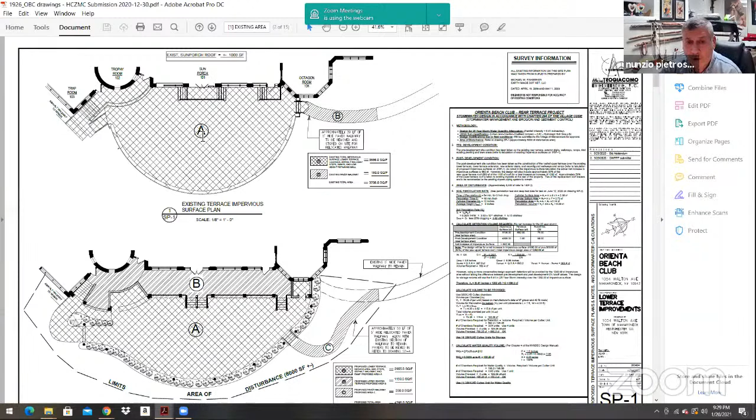You have it now? There's SP1. I see it, yep, okay. So if you see here, the existing terrace - the distance from the existing sun porch rear wall to the point where the concrete planters, the kind of old outdated concrete planters that are only for seasonal flowers, that distance remains the same as far as the impervious surface area.

Not the impervious surface, the distance from the rear wall to the edge of the pavers where the curtain drain and the planting area starts. The main increase in impervious surface, because this roofed over upper terrace here, that's already obviously impervious, as we discussed before.

The main increase is this area down here on the proposed plan, where we're putting a handicap ramp and extending the area to come down from the stairs, and a couple of steps, and then a handicap accessible ramp. So this piece is the majority of the additional impervious surface. There's a little bit here where we're removing the existing stairs and bumping out a little bit.

And then the other increase is, since we're cutting this stair out, we have to reconfigure the walkway to connect to the existing paver walkway. So the new stair to the lower area makes up the balance of the additional impervious surface. I kind of labeled it down at the bottom - that's the explanation on where the impervious surface comes from.

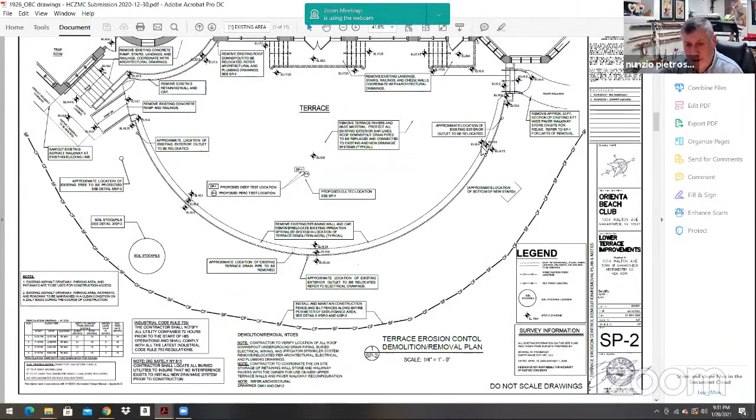As far as permeable pavers, if we go to drawing SP2, that's the existing as it is. These are the details - here's SP4, which is the proposed plan. The current terrace basically sheet flows out from the back of the sun porch, goes through the planters, in the joints between them, and then out into the grass area. There's no detention system at all.

What we're proposing to do is basically pitch everything this way, but along the edge we have a little curbing, which will be flat with the paving stones, and it'll be pitched back to here - there's a little catch basin, like a 12-inch plastic catch basin, and another plastic catch basin here. So the water will come down, flow into this curtain drain. There's a detail - it's basically crushed stone with a perforated pipe.

It'll go into this catch basin here, and then on the south side it'll go from here into the water quality basin, and everything will be at a lower elevation, and then it'll flow into the storage basins.

By some chance - and this was over designed to begin with - any backup storage, if we get a torrential rain that lasts for a week or whatever, anything that gets filled up here will go through a 4-inch relief pipe, which will discharge onto the existing grass, which is where it went anyway. But that probably will never see water coming out of it.

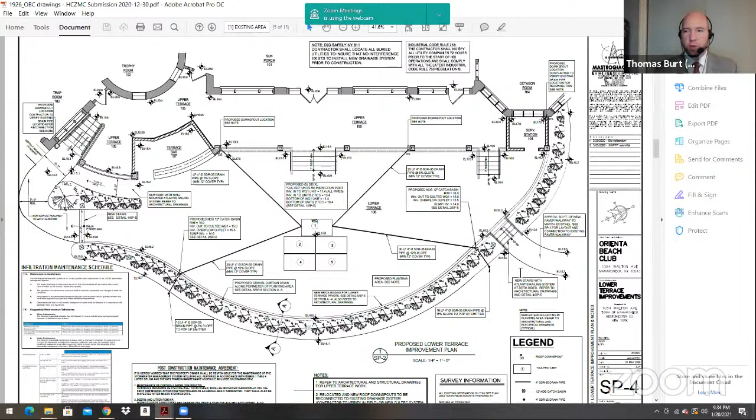That's a clear and useful discussion of what you're proposing. It is not, however, an answer to what I asked you, which was: could you build a permeable terrace here instead?

Well, they are accepting it in a lot of municipalities now. Certain systems - like what is the, can't think of the name offhand - the one that's always advertised on television with the guy with his family in the pool. You're talking about Armatech? Yeah, Armatech. Anyway, they do make an approved permeable paving system, classified based on the industry definition. It's got different layers of crushed stone below, but it basically accomplishes the same thing we're doing here, which is basically storing the water in the ground, because that allows the water to percolate into the crushed stone base over a wider area.

But it's basically doing the same thing, and only certain - I mean, there are some details that you can develop - but only certain manufacturers have had things approved where the surface runoff number, the CN number, is determined to be below the level of what's considered impermeable.

Okay, so it can be done, but we're accomplishing the same thing by putting in this perimeter drain here, which I'll show you the detail right here. This is the pavers down at the bottom, detail 5. Okay, so this will be the edge. That's the paver, this is the curbing flush, and then we have a concrete cradle for it. And then this is going to be your curtain drain where the water flows down, goes into this pipe, and then into the detention system. And the plantings are going to be located here, which will further absorb the water.

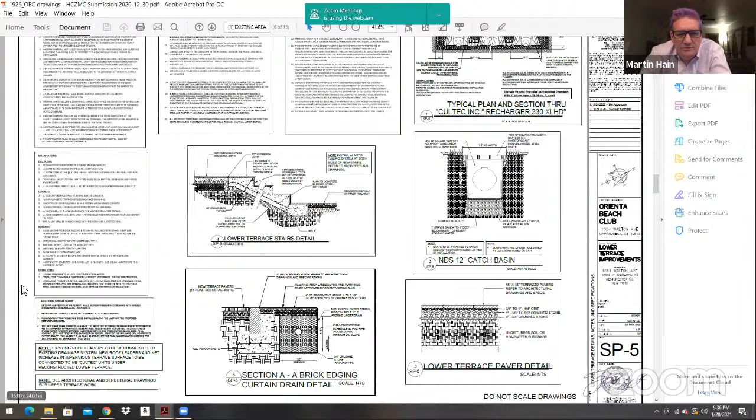I know for sure that Commissioner Hain has a question now, so I'm going to hand the floor to him. Thank you. Can you go back up to the layout? On which drawing? Right there. That's good. Okay, I appreciate when you went through this explanation.

If you compare this one to the existing, it looks like the drainage system that you've proposed here covers the area of where the existing is, but there isn't anything that addresses the additional area that you're adding on the left and on the right, and the additional walkway, as far as the runoff from those areas.

Well, usually, I mean, this area here is what we're talking about - we're basically talking about the additional 692 square feet, all this right side. Please let me finish my sentence. Oh, I'm sorry. So we're talking about the additional 692 square feet - the drainage system that you've proposed here does not address that additional 692 square feet, it addresses the existing patio.

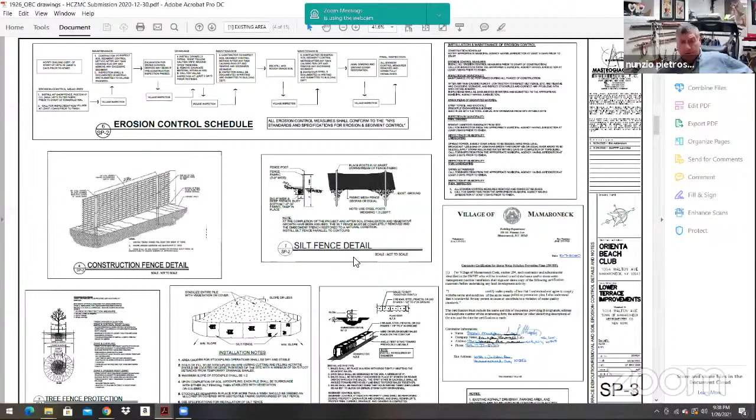No, that's not really correct, because the actual drainage system - if I go back to, let me get the design here, let me blow it up. Come on. Martin, you're on mute again.

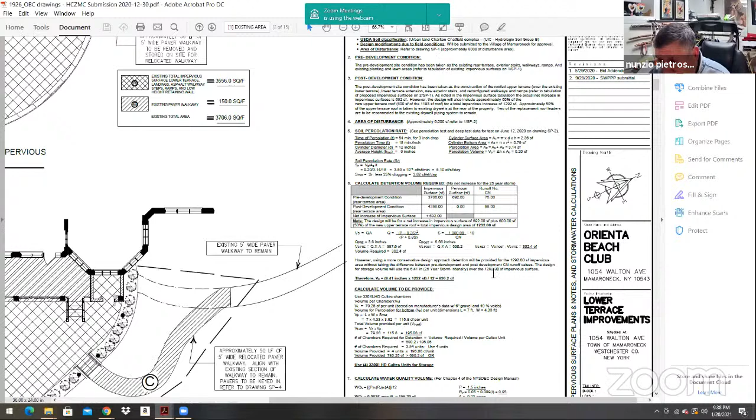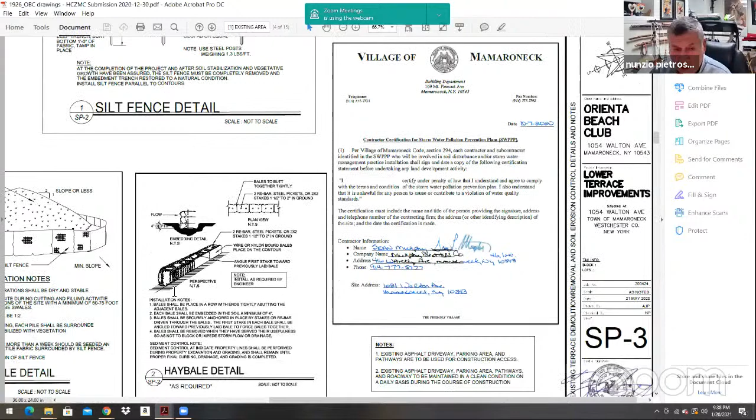We will be capturing all this area up to the top of this ramp here, right here. To the left of that we won't be capturing, but to the left of where you just drew that line is where you're adding the new impervious surface.

Yeah, the way you described it, you're adding a new ramp, and the bump out from the existing is like this piece right here. So how are you handling runoff from grass? A lot of it is grass area.

Nunzio, it's Andrew Spatz, I just want to interject for a second. I need everybody to take into context the area with which the back of Orienta provides between the clubhouse and the beach or the waterfront itself. The area is absolutely tremendous in square footage.

So the walkway, which Nunzio was making reference to, that's certainly not 692 square feet. You're talking maybe 90 to 250 square feet of additional walkway, which could easily be addressed by the mass area of grass, vegetation, and existing soil. So I think with respect to the walkway, they're just making it more accessible, especially for handicapped purposes. I think the immediate area has more than enough ability to entertain and adjust for the impervious surface.

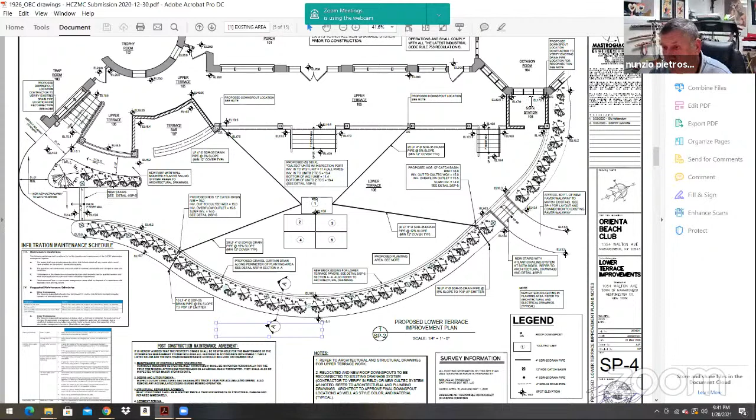Commissioner Haynes, on the right side where there's the service station, you see 108 - Nunzio, move it back up to the right where the service station is. Yeah, I believe that's being expanded upon. And if you look to the left at 105 on the upper terrace, that's also being expanded upon. So it actually does address the larger area, if you want to refer to it that way.

It addresses all of it, Andrew. If you follow the arrow here, it goes around these stairs. So let's say the stairs and this piece go down here, everything else is meant to flow this way. So basically from here and around here, this would be the only area that we're not capturing, because everything else is going to flow in this direction to this drain and to that drain.

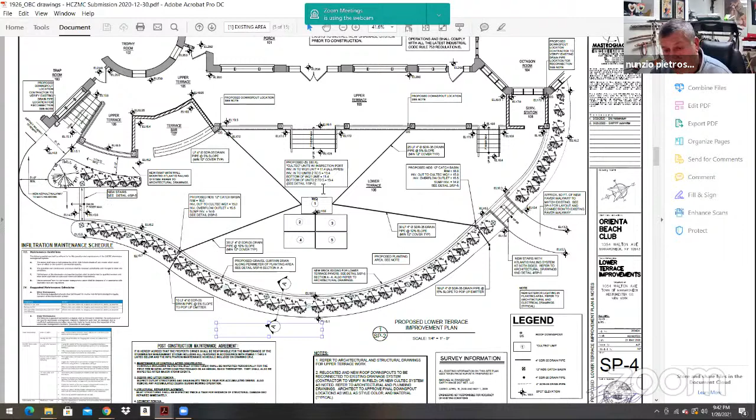So this service area is going to flow down into the planting area, into the curtain drain, and basically go into this catch basin, flowing from here to there and from here to there, into these pipes and into the detention system. So again, if you cut a line through here, this is the only area, probably around 250 square feet, if you look at the totality there.

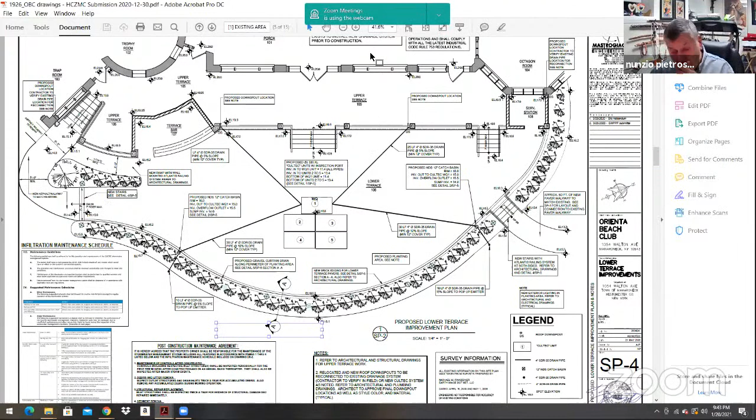And again, this is all existing grass area down here, so that would just come by sheet flow and get absorbed in the grass. Remember, I had said the system has been designed for 1,200 plus square feet, which is double the net increase, because we're picking up some of the existing roof also that really never went anywhere - it came out through and onto the terrace.

Okay, thank you, you didn't explain that pitching before from the left and right side. Okay, so that answers the question, I apologize for that. All right, so that's a little clearer. I had a few other items I wanted to talk about.

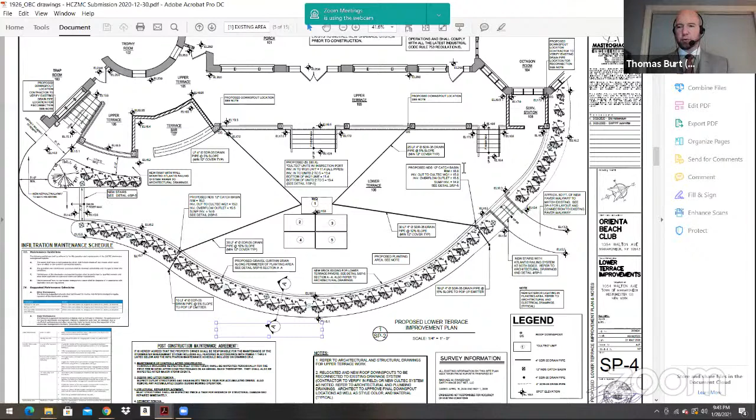What you just said, it's a vast area, and I know roughly what it looks like, but what's the distance from the new construction to the water? To the water, let me see, I had it in my notes somewhere. If you look here, this is the existing - you see the hatching here, that's going to be the planting area, more or less.

But from this point over to - I don't know if that's the property line, and then I have one to the mean high water level. It's 110 feet, and this is 90 feet. Okay, so none of this is within the 100-foot buffer.

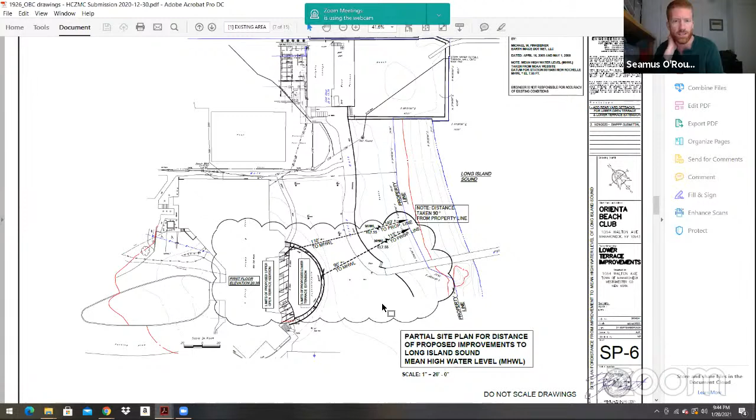Well, it does the next, I was wondering that too. I was looking at the survey. Is the next page that you flashed to a minute ago, with some purple and teal lines, is that the survey? Yeah, that's the survey.

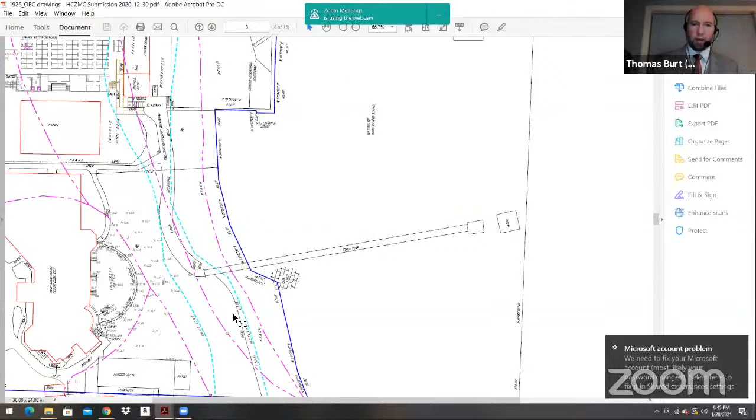This shows the wetland line, I think, but I didn't see the wetland buffer line in it. Let me check. The wetland line is the farthest dashed blue line. That's the beach, right there. That's the tidal wetland line. Okay, because there's a 100-foot buffer from the tidal wetland, and I don't see the buffer line marked. We're going to need that.

But as I said, over here where we're extending, right here, I could show you the distance, but this is way over 100 feet where we're extending this area. The only thing we're doing here is bumping out a little bit where the existing stairs are, which is already basically impervious surface.

Right, this is just preliminary review. We're telling you what you're going to need. So you want that setback, the wetland buffer line, the 100-foot wetland buffer, so we can look at it, because that has implications. Among other things, if you do anything within the 100-foot buffer, you need an environmental consultant to make a record that there will be no negative impact to the protected wetland from the work inside the buffer. So it's important to show that on the map so we know whether we're talking about any disturbance inside the buffer, or you're doing work entirely outside the buffer.

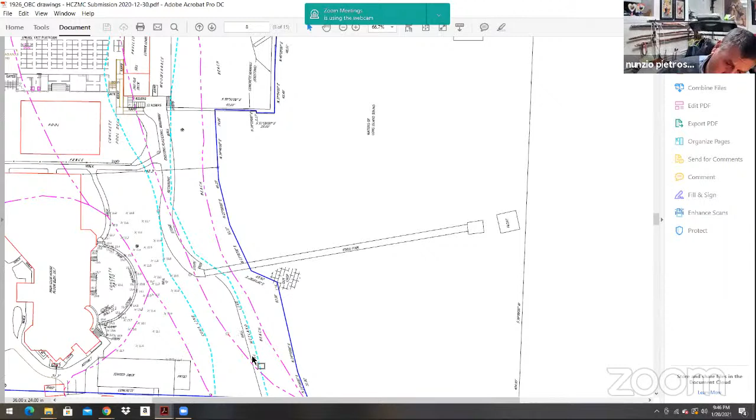Okay, and that's from the tidal wetland line. Yep, I think the tidal wetland line. Any cut, fill -- and that was my next question. Yeah, and impervious calculations would be helpful to know what's inside the wetland buffer and what's outside.

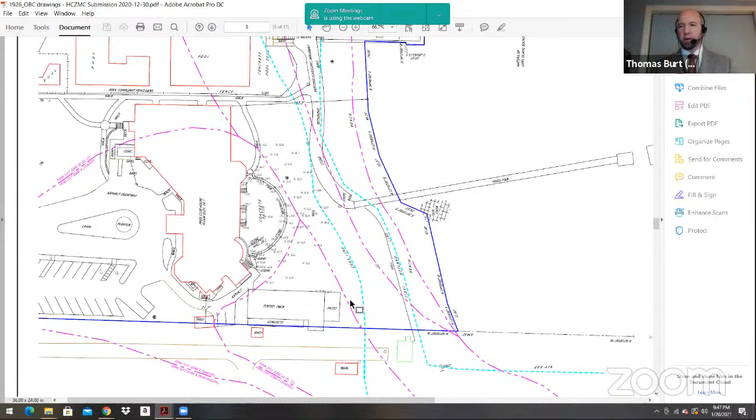Yeah, that's where I was going to go, Thomas. Whenever we were getting there, that was my next checkbox item. If anybody watched the last applicant, you know that we have recurring issues with the net fill rule, and your life is a lot easier if there is no net fill in a floodplain. I didn't see a grading plan at all here, but I could easily have missed it.

A lot of materials here, and this is the first time looking at this. There is no fill. The proposed and existing elevations, spot elevations are shown. We did get an updated survey done recently, I think, as you can see by the date on it.

What's going to happen here is basically the excavation we have from the Cultec units that are going to be installed over here is what's going to be used, once we get rid of the planters, around the perimeter. It's basically a cut and fill -- we're excavating and using it. The only thing that's going to be added would be the topsoil to dress the planting area. Obviously you can't just put that material in, you've got to put 6 or 8 inches of topsoil there. I guess the landscape architect could address that better when he gets to go over his planting.

So it sounds like the answer is zero net change. I believe that's what you're asking, Chair -- is there a net change? And I don't believe there is. No, that is very helpful. Thank you. We were watching the previous application, so I made a note on my yellow pad too on that.

And Andrew, the more that all that can be laid out for us, the easier, right -- to show the lines, to show the calculations inside and outside of the wetland buffer is great. Just because, obviously we need the wetland buffer line added, and then throughout the site plans and construction plans where you can show grading, show the cut fill calcs, impervious, and make the distinction between the wetland buffer versus not is always helpful, I think, when that's broken into components.

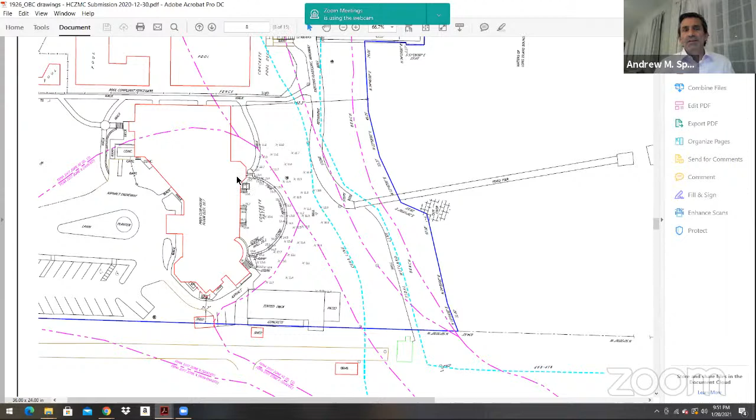Chair, if I could clarify, this parcel faces the Long Island Sound. Living in Orienta and walking along Rushmore by the west basin and east basin of Harbor Island, there's no physical way to see this property from Harbor Island. Even if you're on the beach at Harbor Island looking due southeast, you can't physically see it. I just want to be able to advise my clients accordingly. We could take pictures, but believe me, I understand the concern—you just can't physically see this parcel from Harbor Island.

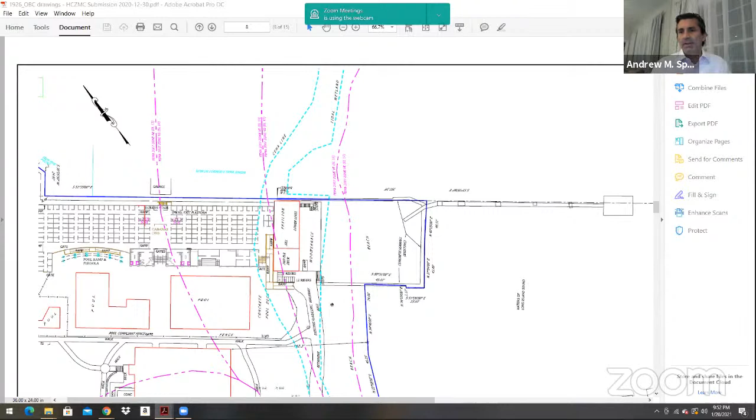It might be useful to have an aerial, just so we can assess that, look at it, and have a record confirming it's not within the Harbor Island view shed. That's easy—until recently I used to confuse this particular club with Beach Point, so I get the confusion, but we can easily get a bird's eye view from above. No problem, I'll get an aerial map from the county website and show an arrow direction from Harbor Island so you can see the view line and what's in the way.

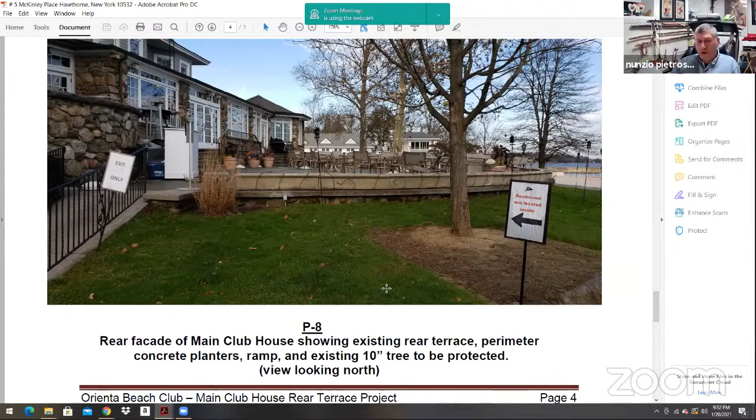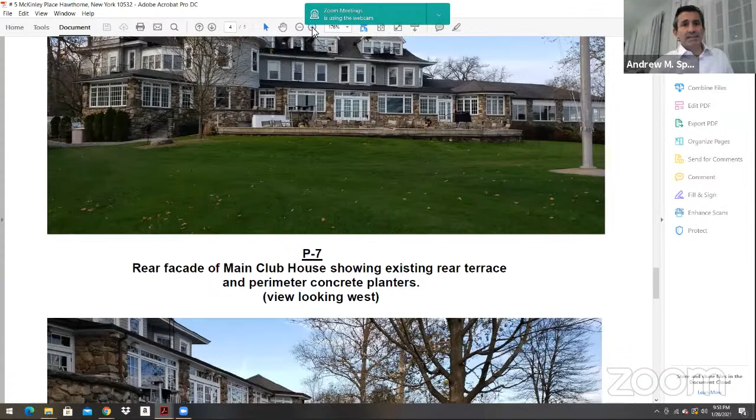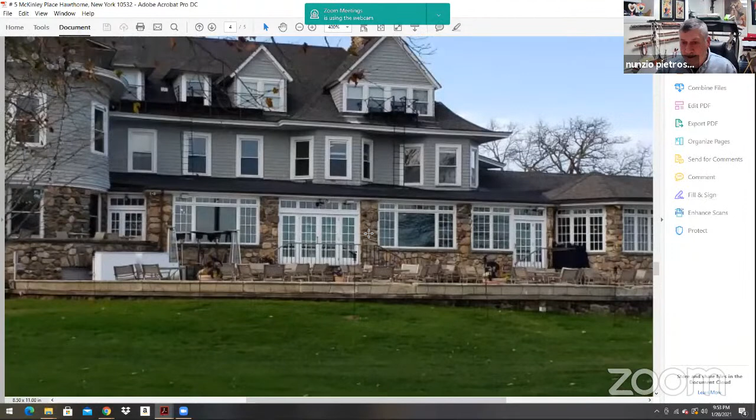You guys saw these pictures, right? We were talking about the grass area—anything you see now, even if visible, the final product will have plantings all over here. That's all going, we're taking it all down, including that cement. It's certainly going to be a better appeal. The architecture will match the existing building, the stone and everything else. We'll have a planting bed here, and the landscape architect will discuss that, but a lot of it's going to be screened.

I have a quick question about this picture—you can see the elevation of the land changes on the right-hand side. If you're eliminating the retaining wall there, how are you going to address that, since it seems like the new plan makes everything even straight across? Is there going to be some fill? No, there'll be a pitch—I'll finalize those grades for you so you can see it.

Maybe we'll rebuild a section of this wall if we have to, basically where these stairs are going to go, since they'll go to the existing grade. So there'll be cheek walls for the stairs, and whatever we need to make up this grade right here. Yeah, it would be helpful to see that view as well.

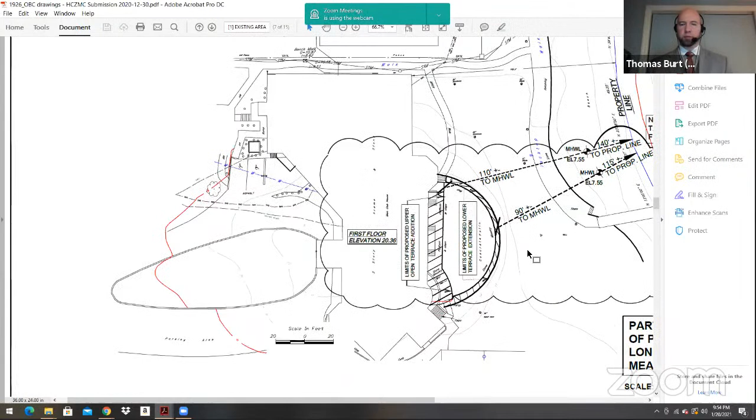Okay, it's easier to know where we are with the view shed if we know it's not actually visible from Harbor Island Park. That really reduces how much we have to think about aesthetics.

Thomas: I happened to be at the site with Frank Tavolacci over the summer, and I can verify there's no view of Harbor Island from this back patio area. It goes straight across to Long Island. I'd like to have an aerial just so we can say we've touched that base on the record, that you can't see it from Harbor Island. We got that, that's easy enough to do.

Okay, I've run through my checklist of items. Martin, you got anything else? No, thank you. Seamus, Lisa, Andrew. Not me.

Chair, just so I can round third here, I have three items. One, could the surface be pervious as an alternative for the additional sidewalk or walkway, rather than impervious? Two, distance from the patio to the waterfront or tidal wetland buffer line, and any disturbance within that wetland area. And obviously the bird's eye view of the property. So I have three particular items, and I understand Commissioner Hain would like to see the grade outlines, which we will certainly get for you.

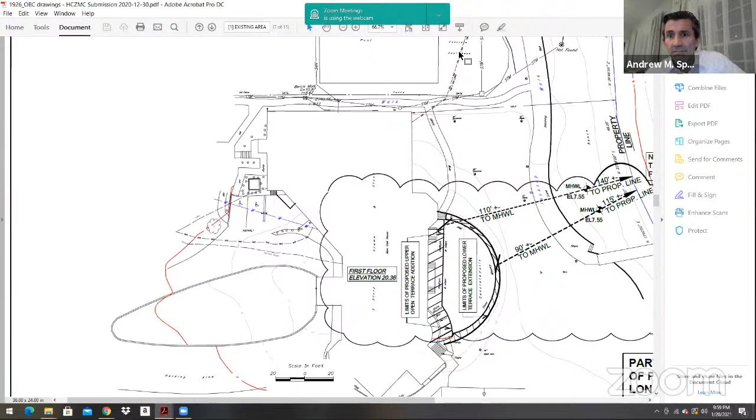And so I'm through my items. Actually, Richard, can you share a little bit about the vegetation and landscaping if you're still on? I can't see who's on and off, but do you want to take over the sharing on my screen, since I don't have the landscape plan.

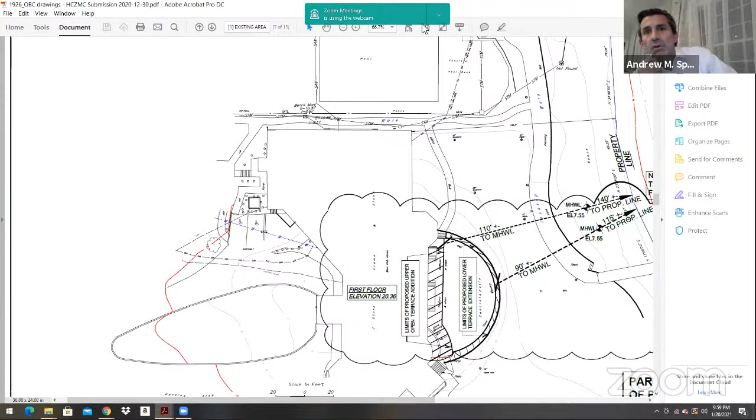I know Richard spoke with our landscape consultant for the village, Susan Oakley. So I want to make sure the chair and commissioners are aware that we're very proactively taking care of the landscaping component as well, because I know some of the members back on the Flood Mitigation Advisory Committee like landscaping, like vegetation. So I want to make sure we have that covered.

32 square miles of Westchester County drain right into our harbor. If we don't think about where the water goes... yes, I was listening to you about that.

Richard, you on, bud?

Amber, do you know if he's on mute? Let me see. Andrew, he might be on a phone call. Okay, thank you.

Richard. Oh, hi, sorry, I didn't realize I was on mute. What's the name, Richard? Yeah, Richard, but he may be on a phone number. I'll give you the first two digits. He has no last name so I don't know. 220, Richard. I'm sorry, Richard, I should know this by heart by now. No, the person, it's Richard Horstman. Oh here, yeah, listed. 220 would be the phone number. I just put through someone named Richard, I don't know if that's your Richard. Richard, you there, buddy?

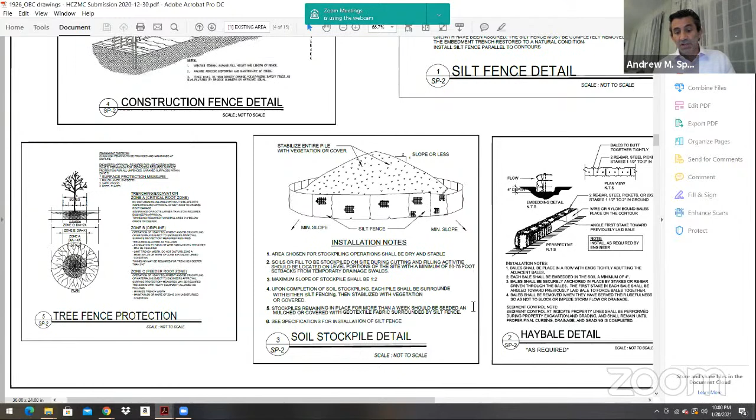He's on mute. You know what I'm going to do? Would it be acceptable to the chair and fellow commissioners, I'm going to try calling him on my cell and try to hook him in that way, if that's okay. We can make it work.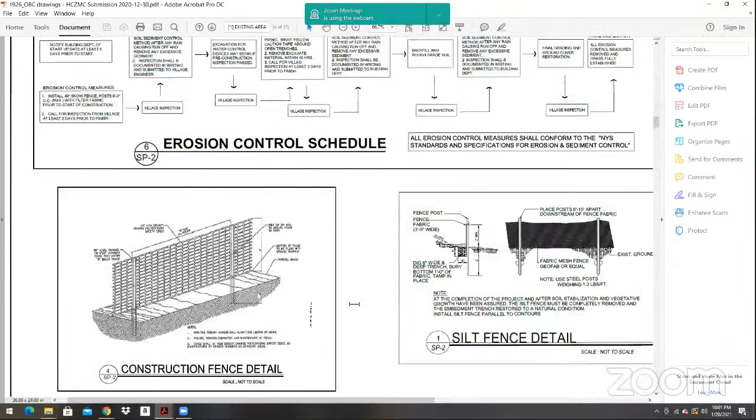Can you hear me now? Oh yeah, perfect, we hear you Richard. Okay, you can. Sorry, the microphone was being covered up.

As long as I can be heard, let me say that I've been talking and coordinating with Susan Oakley regarding the appropriate plant materials to be used in the plant bed along the edge of the lower terrace. The plant bed size will remain as shown on the drawings previously submitted, or that you're looking at now.

I'm adding the plants for that bed. Susan has given me the plant list that is in the village code, and additionally, in discussing the plants with her, she has indicated that some native wetland area type plants can also be considered for this plant bed. I expect I'll have the planting plan for her review in the next couple of days.

And I'm trying to select plants that will remain low in height to minimize the amount of pruning that would need to be done and to keep the views open to the water, and plants that will have seasonal color and interest along the edge of the lower terrace.

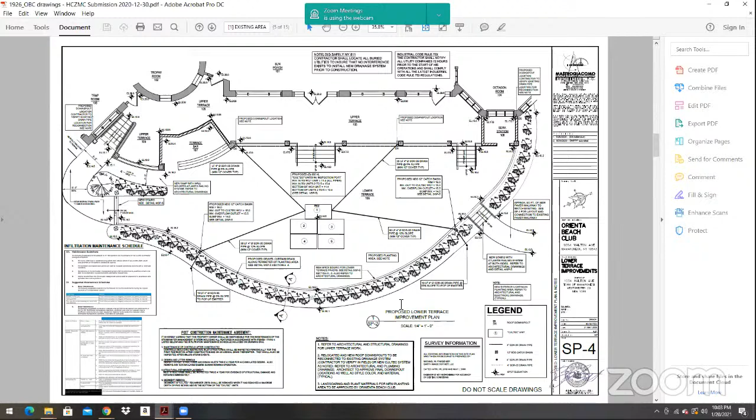I just brought that up because our preference is always native plants. So if it could be all native plants, that would be definitely better in our eyes.

Okay, did any of my fellow commissioners have anything else? I don't think so. Wonderful, we've taken this as far as we can tonight, and we look forward to seeing you back.

Commissioner, just so I have an understanding, we'll get these documents, we'll then circulate them back to Amber, who can circulate it to the Chair and fellow commissioners. We're scheduled, I think, to go back to planning in about two weeks.

My question to you is only because ideally the club would love to start doing their project in early spring with the thaw. If we are able to provide you the documents, which I know we will be by the next meeting, is it likely, if everything falls into place, we could find a consistency on that date? I don't want to put you on the spot, but I would dearly love to have more applications that we can review for preliminary once, consistency once, vote, and not see again. I would love to make that happen.

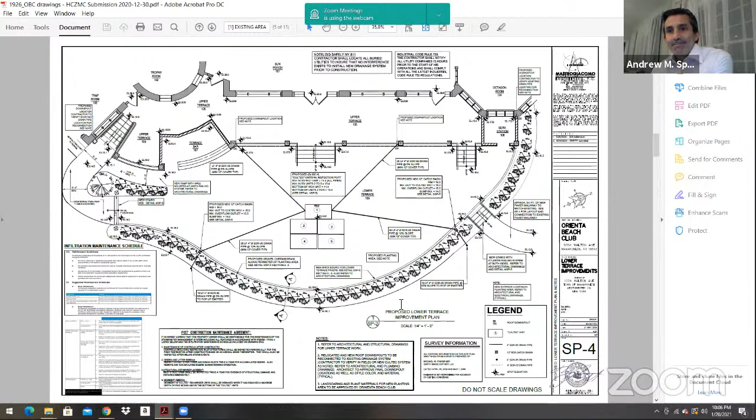Good to see everybody. Anything else from my team? Anybody? I think I'm talked out. Thank you for your time, Commissioner.